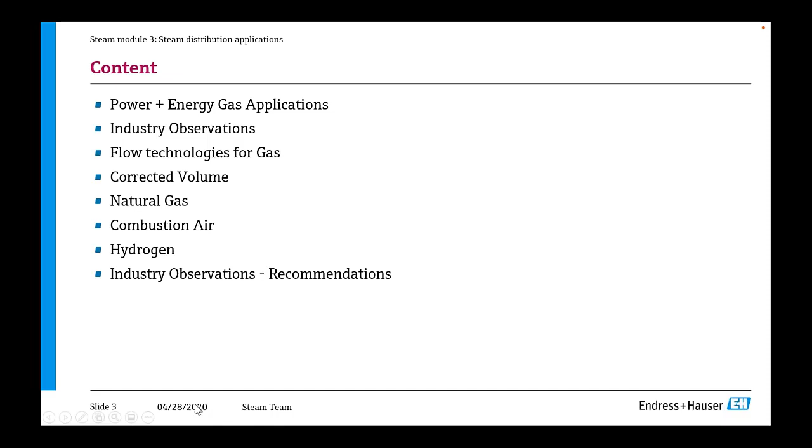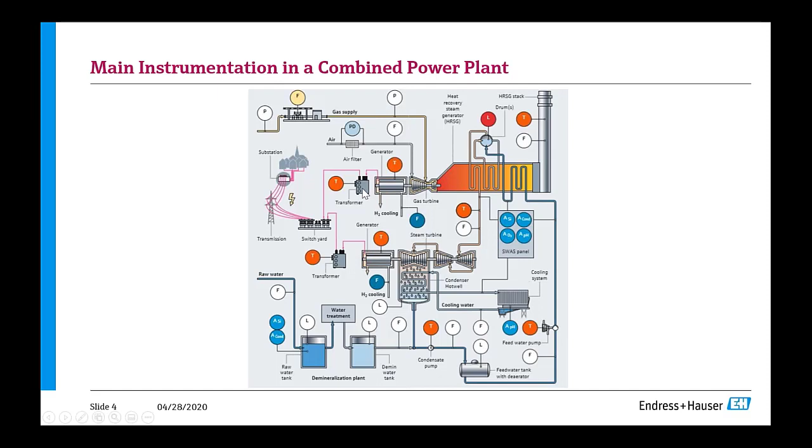But what we focus on today is the gas side, and we will focus on natural gas, combustion air, and hydrogen for generator cooling.

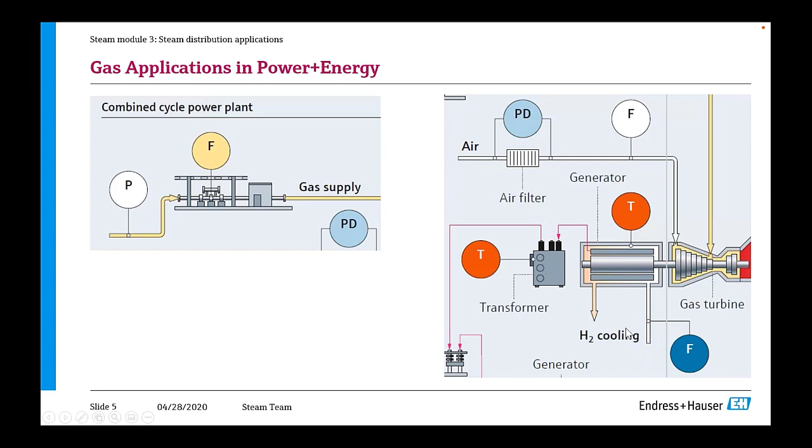Here you see those in detail. The inlet for natural gas, but you also have measurements down to the power blocks, at this metering station. Here we see the air measurement for the combustion air, and here we see the generator cooling for the hydrogen cooling.

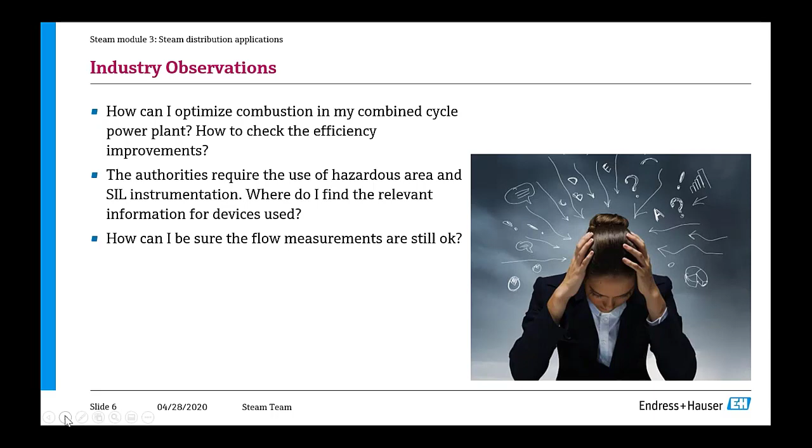The authorities require the use of hazardous area and SIL instrumentation. Where do I find the relevant information for the devices used? And how can I be sure the flow measurements are still okay, which is an important question, especially when it comes to measurements of stuff that has an influence on the environment.

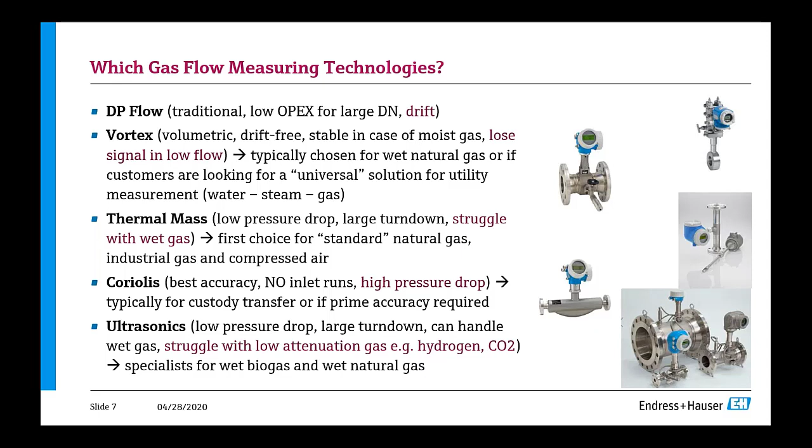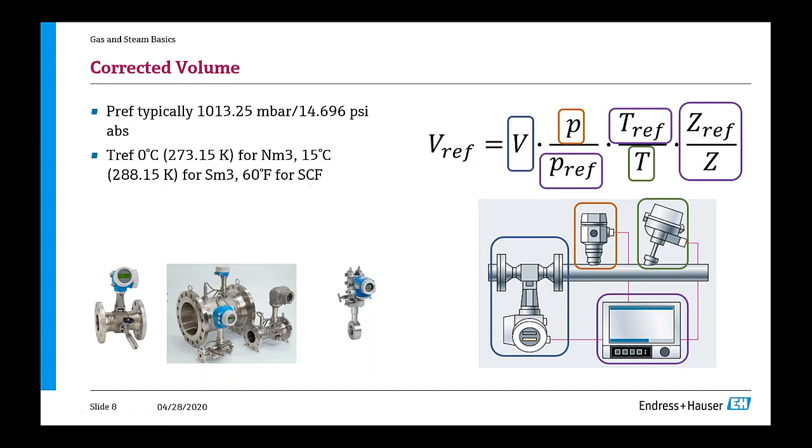And then they measure temperature again in kelvins. Flow computers and so on will do the conversion themselves. And here you have the relation of the compressibility factors, at reference conditions to operating conditions. Reference temperature, by the way, for standard is 15 degrees C, or for standard cubic feet, it's 60 Fahrenheit.

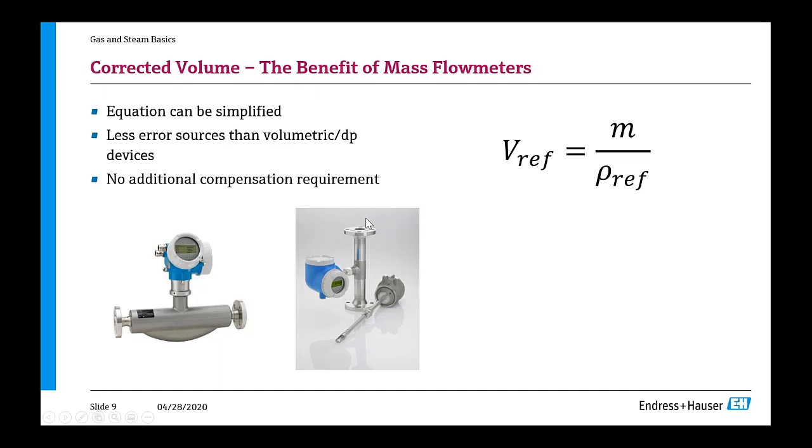The beauty is if you're now using a mass flow meter, the world becomes much easier, because that corrected volume is now mass divided by the reference density. So this reference density, you either know - okay, it's a gas that doesn't change its composition, so you just divide the mass by the reference density - or you read that in from a gas chromatograph at the inlet of your combined cycle power plant.

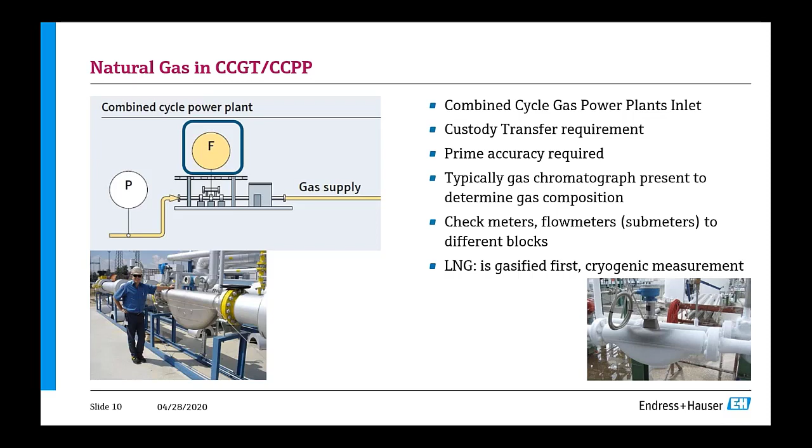What you also find is LNG. So on the left-hand side, you see the inlet of a combined cycle power plant here in Europe, and on the right-hand side, you see an LNG application, where this natural gas is liquefied. That's at minus 162 degrees C, where you find liquid natural gas. That's good for storage, for instance, of the natural gas, but then you will actually convert that to a gas before you burn it.

Here's an example where we replaced a traditional meter - a turbine meter, turbine flow meter, the TFM. And when this customer installed the ProMass, he found a drift between the turbine and the ProMass. First he thought the mass flow meter of ours was wrong, but he found out later, because both meters were sent for calibration at Pigsar on natural gas - that's a custody transfer authority in Europe.

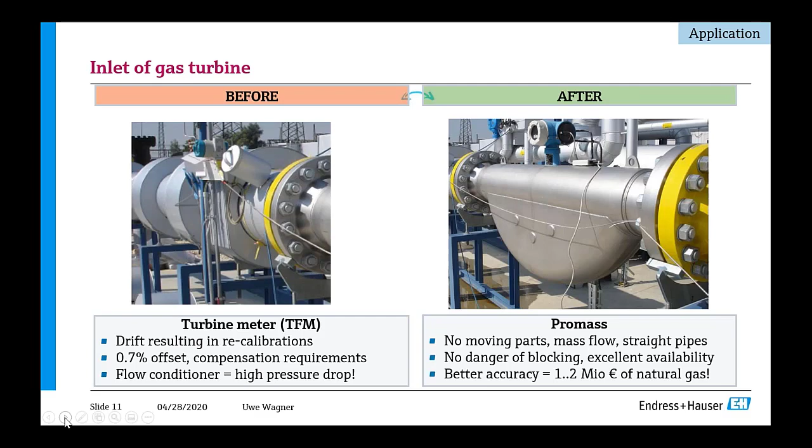And they found out that the turbine had an offset of 0.7%. This customer told us that this accuracy improvement for him meant savings of 1 to 2 million euros of natural gas per annum. So a very interesting reference here from Europe, in the Munich area.

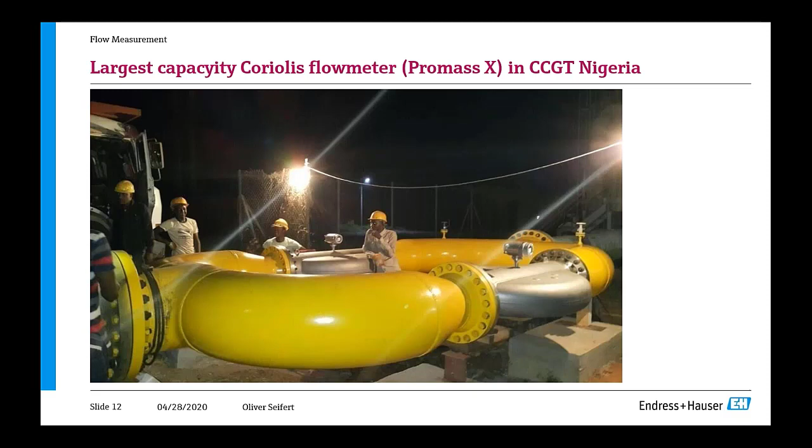Here's another reference - a bigger line size. So here you have two of our largest Coriolis meters, two 14-inch meters in parallel, measuring this inlet to a combined cycle power plant in Nigeria.

So the first choice when it comes to natural gas in a combined cycle power plant at the custody transfer measuring station, from my perspective, that's a mass flow meter like our ProMass F or X. You get the best accuracy there is on the market. You don't need compensation requirements - you directly get the mass and you divide by the reference density of your gas chromatograph.

It's a no-brainer that even though you may have a custody transfer ultrasonic, that has on paper a relatively good accuracy, you then have to add the uncertainty of the components - pressure, temperature, and also the gas composition - and all of a sudden you have much higher uncertainties than what you get with such a solution.

So this is also suitable for cryogenics, these mass flow meters, and they come with SIL 2, so for IEC 61511 applications. Or here on the right-hand side, for submetering to the different power blocks, there you may want to use such a Prosonic Flow.

That's an ultrasonic meter for check metering also - checking such a custody transfer meter, if that's still okay, or for submetering to the different power blocks. And you have short inlet runs, but it's also multivariable - it's got integrated pressure and temperature compensation, as you can see here.

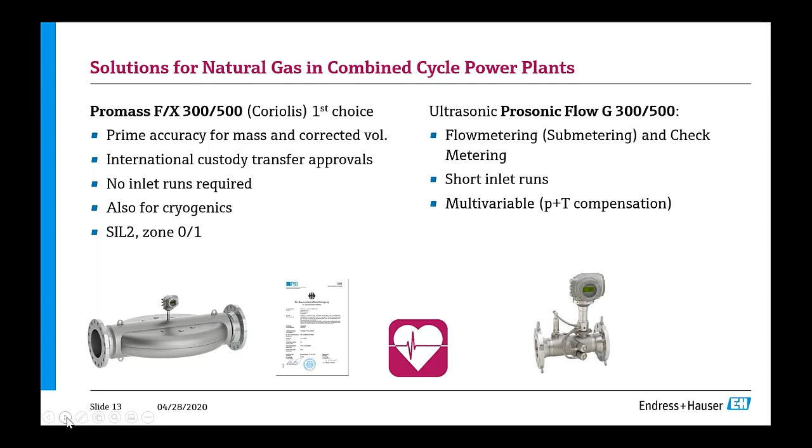We come to the next application, that's generator cooling - hydrogen cooling, so this is what we see here. Hydrogen is a low density gas.

We have the hydrogen cooling to the generator. It's a low density gas, it's got low attenuation also. That's why usually you don't use ultrasonics here. And it's at low pressures also, so 7-8 bar-ish.

We as Endress+Hauser have got a lot of experience here in this application using DP, Vortex, and we've been using Coriolis thermal mass. I do like the Coriolis here because of its gasket-free construction, and it's got optimum accuracy, and you find a loop-powered option as well.

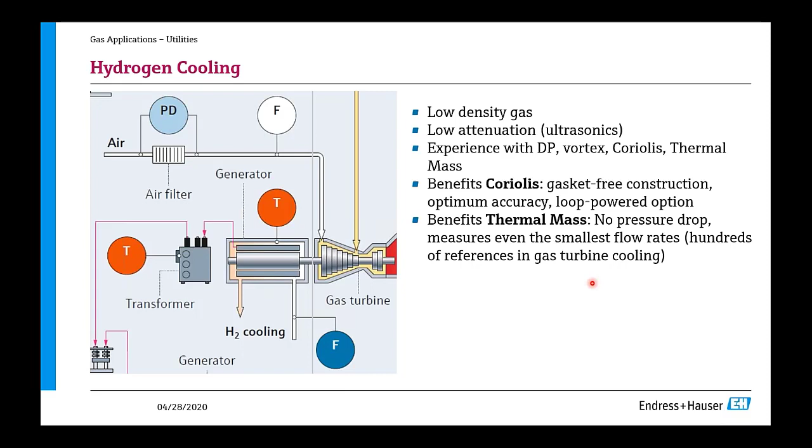The thermal mass is, however, used quite a bit. We've got hundreds of references in the US especially. Here you have no pressure drop. It measures even the smallest flow rates - hundreds of references really in gas turbine cooling, with GE.

When it comes to thermal mass, hydrogen is, however, I must say, quite a challenging gas because of the measuring technology itself. The thermal mass provides you directly the mass or the corrected volume of your hydrogen. It's multivariable, you don't have pressure drop, and you've got a large turn down, and you can also measure at these ranges.

However, you see here, this is where we calibrate our meters on air, and this is where you use the meter in hydrogen. So the characteristics are quite a little different. That's why, in the US, very often these meters are actually recalibrated on hydrogen.

That's done by the OEMs we have there. So that's one challenge solved - you can improve the accuracy. This is what you see here, so that's a calibration on hydrogen.

The challenges till now were that you need a lot of inlet runs with thermal mass. So here we will have a solution with our next generation. They measure flow in only one direction.

So in a hydrogen generator cooling solution, you would like to know, is it sometimes the hydrogen coming back? So here, this is something we can do in the future.

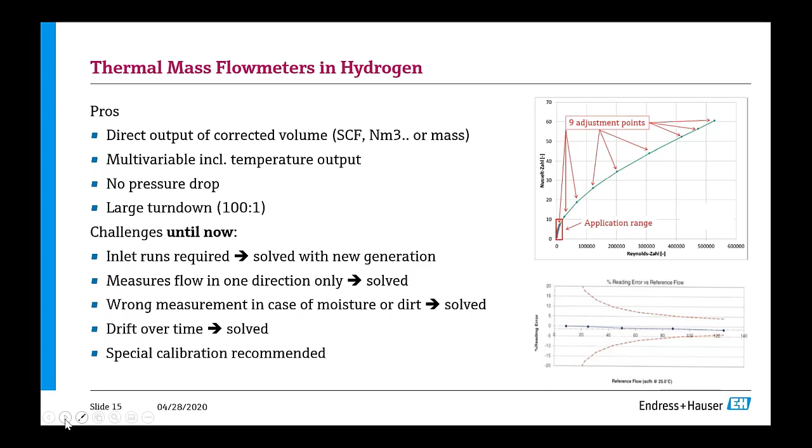So what are the solutions for hydrogen? First, we have the T-mass 300/500. As I mentioned, he's the first choice - this is this future device.

It's coming later this year, so only a few weeks or months we are away to get the release. The beauty is you don't get any pressure drop with these guys. You have an integrated flow conditioner option here with short inlets, so this flange meter comes with a flow conditioner welded in.

And when it comes to a bidirectional solution, you have the flow conditioner at both sides even, to get short inlet runs. So we can even shorten the inlet runs to 2DN, with an increased uncertainty, however. This is not a problem.

These meters are drift-free, the new sensors that we've got, and they can detect moisture and drift using heartbeat technology. And we come also with a status input for purging, so if you use switching between the hydrogen and air for air purging, you can measure both actually using this meter. So this is beautiful for this technology here.

And it comes with SIL2. This is, however, still pending this approval - that takes some months, maybe.

Coriolis - here the ProMass A200, that's a 2-wire mass flow meter for small line sizes, as you usually use here in hydrogen. That's the best accuracy you can get. It's loop powered, and it's got nice diagnostic capabilities as well. And it's coming with SIL2 and even Zone 0 approval for the device.

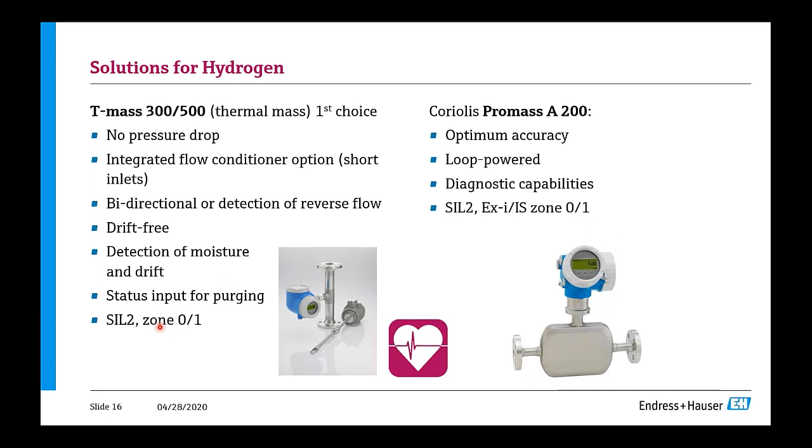Here inside the tube, okay, both have got that - Zone 0 inside the tube and Zone 1 for the electronics.

When it comes to combustion air, so this you do measure to adjust the air-to-fuel ratio. Typically here you have a lack of inlet runs. You find rectangular ducts or round tubes here, and typically you're using insertion devices like pitot tubes or thermal mass flow meters.

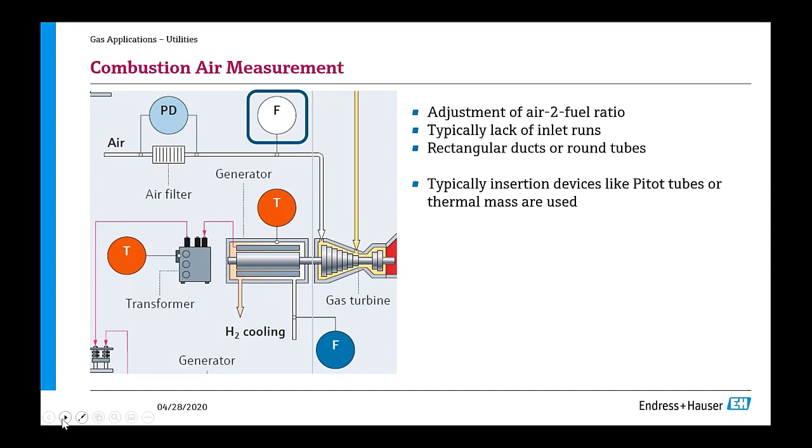So the mass flow meter has the benefit that you get the mass output directly, and you've got a great turn down, but moisture can cause a misreading, that's an issue, and you have a certain inlet run requirement. Of course, with the insertion type, you can't install a flow conditioner very easily here.

With DP flow, the primary measurement is DP only, so you need compensation by pressure and temperature. And they're subject to drift, and their turn down is really low. Typically, you find only a turn down of 3 to 10 to 1, as opposed to 100 to 1 using thermal mass. The averaging effect, however, reduces the inlet runs required.

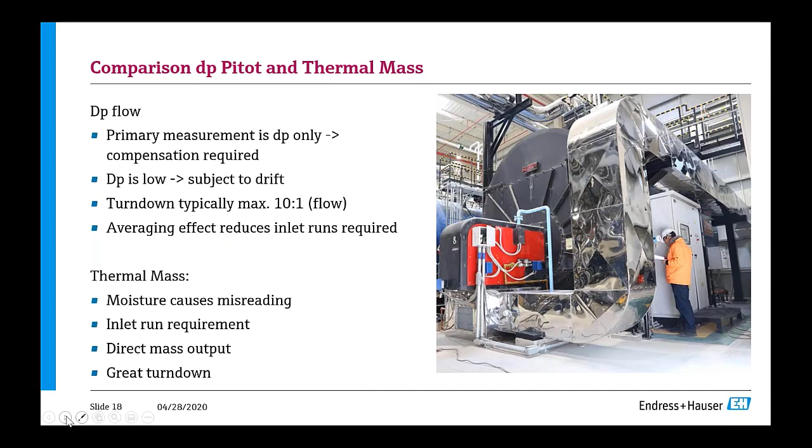So those are our solutions when it comes to combustion air measurements, as I mentioned. Mainly the t-mass 300/500, typically as an insertion device you will find here.

It doesn't have any pressure drop. You have got integrated flow conditioner options for the flanged version only. So this is rather for smaller line sizes, but this is maybe relevant for other applications. It's drift-free, and you can detect moisture. That's also a beauty—that's one solution for the former problems of the thermal mass flow meters.

And only if you wait a few weeks or months, this one is available—the pitot tube with the Deltabar S, that's loop powered. You've got an averaging effect, and it's compensated, for instance, in an RMC 621 flow computer by pressure and temperature.

Also, this comes with SIL2, however, not for mass, just for the DP. So if you need SIL2, then you need SIL2 also for pressure and for temperature.

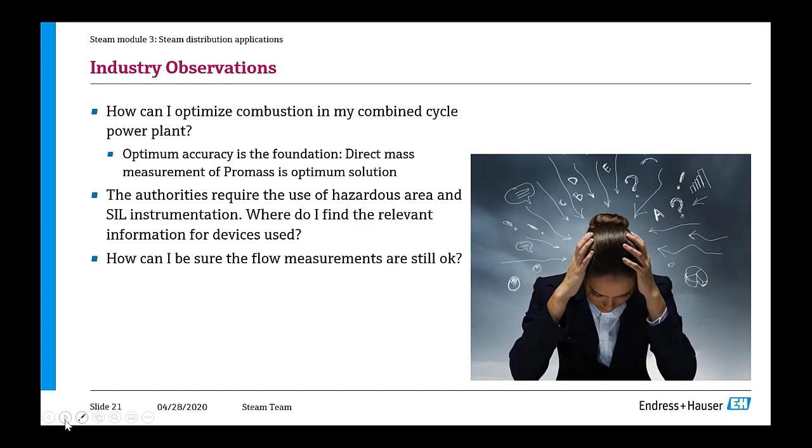So we come back to the industry observations. The first one was: how can I optimize the combustion in my combined cycle power plant? The optimum accuracy is always the foundation. If you want to know how efficient you really are, then you need good measurements, of course. And the best accuracy you can get is using the Promass for the natural gas measurement.

Then we said the authorities require the use of hazardous area and SIL instrumentation. Where do I find the relevant information for devices used? Especially for the functional safety parameters, this is very easy.

So these parameters can be found under endress.com/SIL. All devices that have IEC 61508 or are suitable for SIL2, SIL3, they have got this FMEDA, the documentation of the safety relevant parameters. And for hazardous area devices, of course, we have all the entity parameters documented.

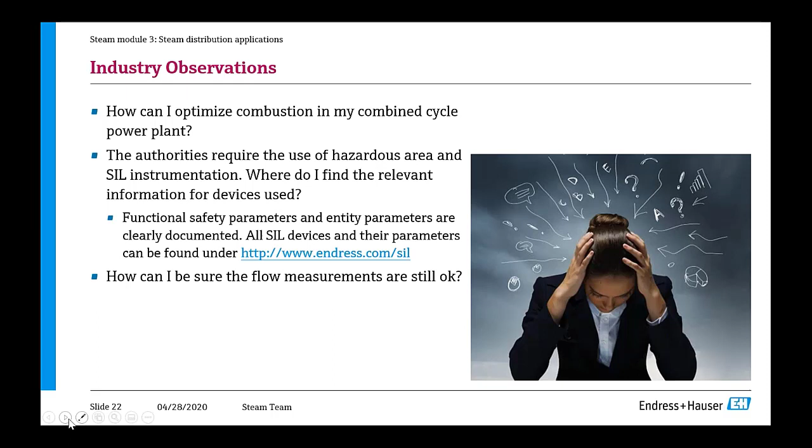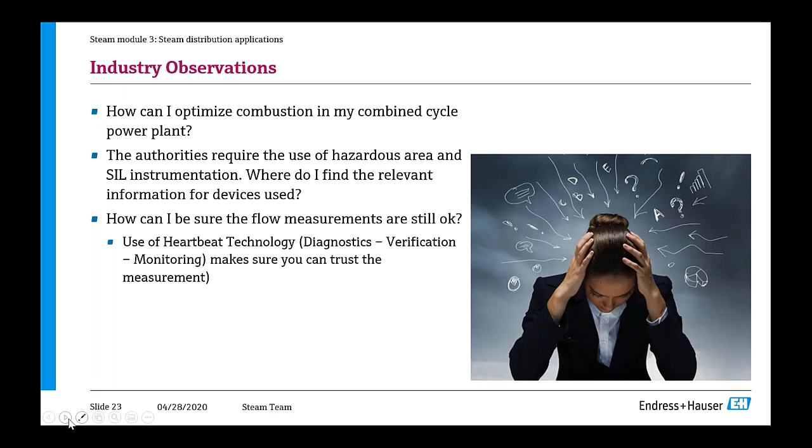Then, how can I be sure the measurements are still okay? I just mentioned you can use this heartbeat technology, especially the verification. Creating verification reports can help you make sure that you can still trust the measurement and prove that to the authorities. Last but not least, I'd like to share with you some references, some YouTube videos explaining the flow principles.

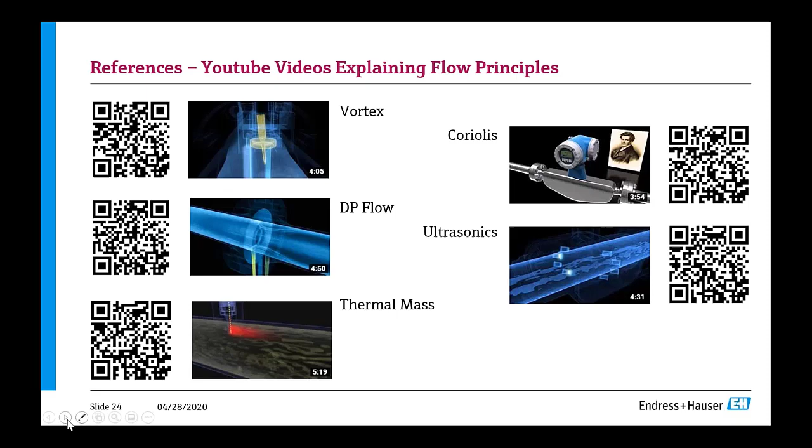So if you go to the Endress+Hauser YouTube channel, you find these video channels easily, and each one is between 3, 4, 5 minutes typically—these videos explain very nicely how these flow principles are working. And another one: here you have our complete offering for the combined cycle power plants. It's a very nice brochure that Uwe Wagner did some time ago. I really like it. So here you have the QR code to go into that.